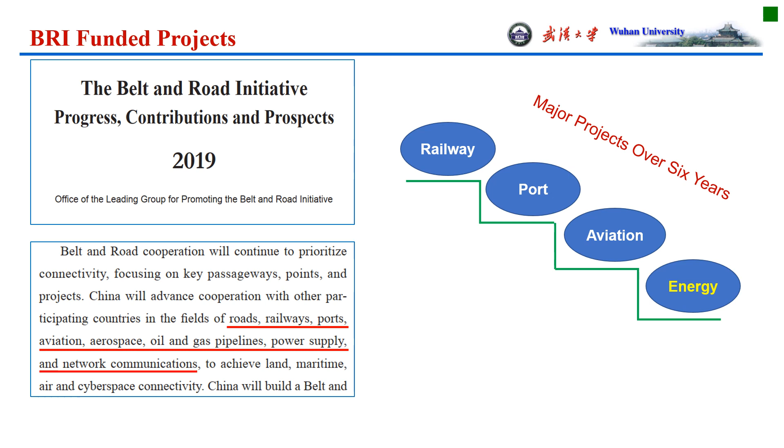Take China-Pakistan cooperation for example. 19 projects under the framework of BRI have been started or completed by late 2018, among which 7 energy projects have gone into operation with a total installed capacity of 3.4 million kilowatts.

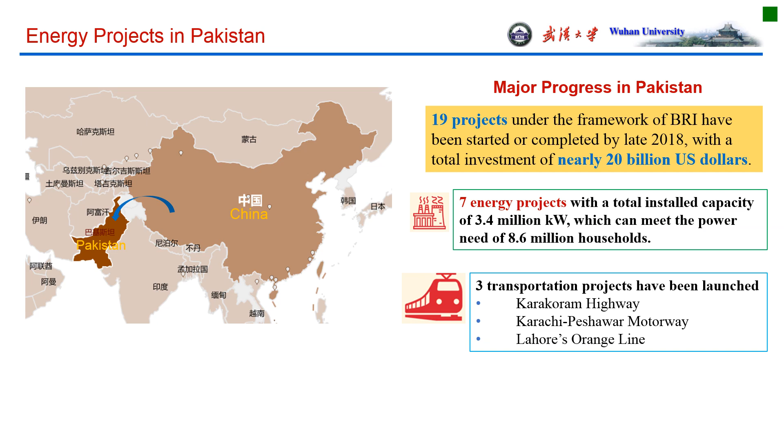which can meet the power need of 8.6 million households. In Nepal, several energy projects funded by BRI have gone into operation too.

Take the Upper Trishuli 3A hydropower project for example. It went into operation last year. The Prime Minister said this project would help to reduce electricity import from India and promote industrialization and modernization of agriculture by increasing the use of electricity.

According to the rules of BRI, more and more hydropower projects in Nepal will be funded. Since hydropower belongs to clean energy, that's why we chose hydropower as a cooperation area between WHU and KU.

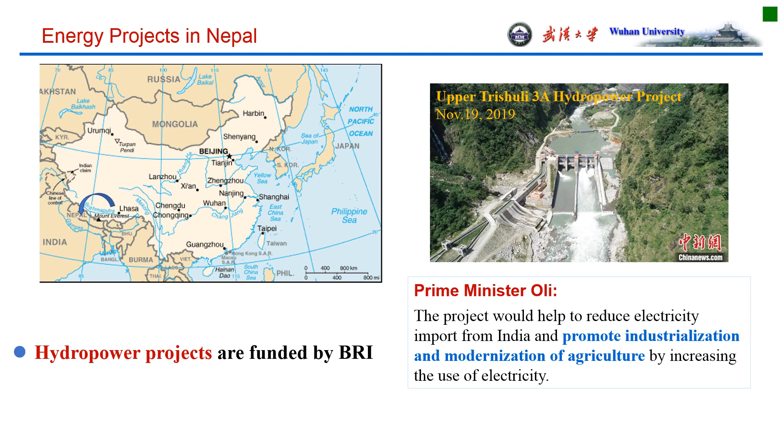It is reported that more than 55% of undeveloped hydropower lies in Asia. All countries in the Himalaya region, including Nepal, have huge hydropower potential.

Under the framework of BRI, developing hydropower in the participating countries will be funded. On the other hand, new technical requirements appear when developing hydropower in the Himalaya region. The sediment problem seems to be a major obstacle for most of the rivers.

There are 20 billion tons of global sediment flux from rivers to the oceans per year, out of which around 6 billion tons are contributed by rivers originating from the Himalaya.

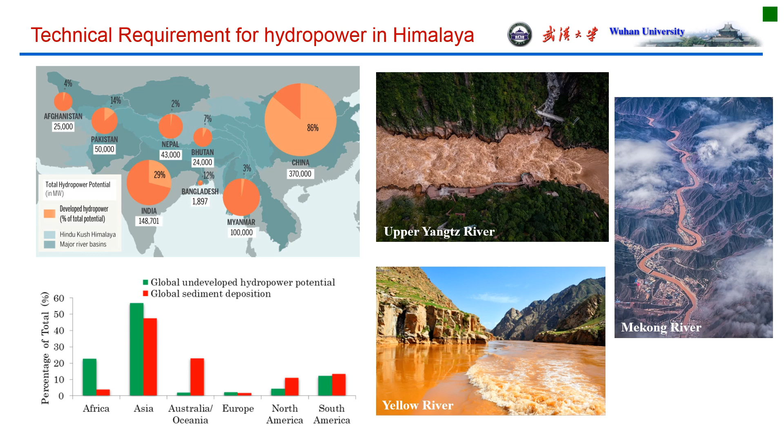The sediment erosion of hydraulic turbines is a major challenge in hydropower development in the Himalaya region, such as China, Nepal, India, Bhutan, Pakistan, and other related countries.

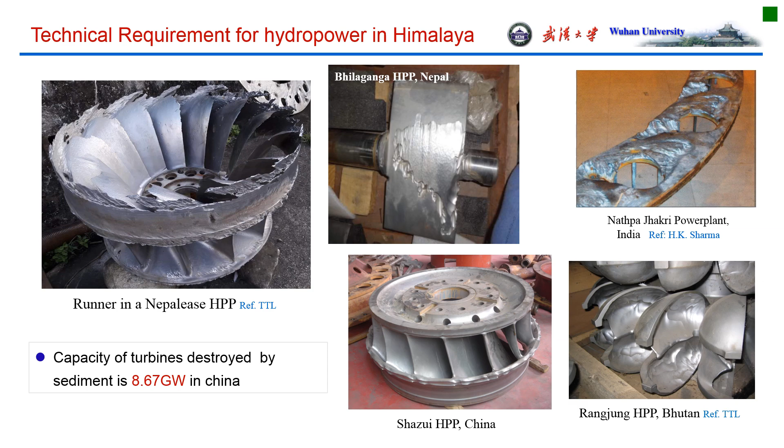We can find from all the figures, in every country, silt erosion is serious. In China, it is reported that the capacity of turbines destroyed by sediment erosion is 8.67 gigawatts. So international cooperation is necessary to meet the technical requirements.

In 2017, an MOU between Wuhan University and Kathmandu University was signed in Kathmandu. Then another MOU between the School of Water Resources and Hydropower Engineering of Wuhan University and the School of Engineering of Kathmandu University was signed too.

The two sides planned to build a joint research center, the Hydropower Research Center for Himalaya Region. It is called for short HRCHR. It focuses on hydropower in the Himalaya region, and the cooperation is under the framework of BRI.

Last March, WHU and KU finalized the draft of the LOA. The president of WHU approved the LOA one month later. Until now, we are waiting for the response from the KU side. I really want to know what is happening at KU. Anyway, we will wait until the deadline.

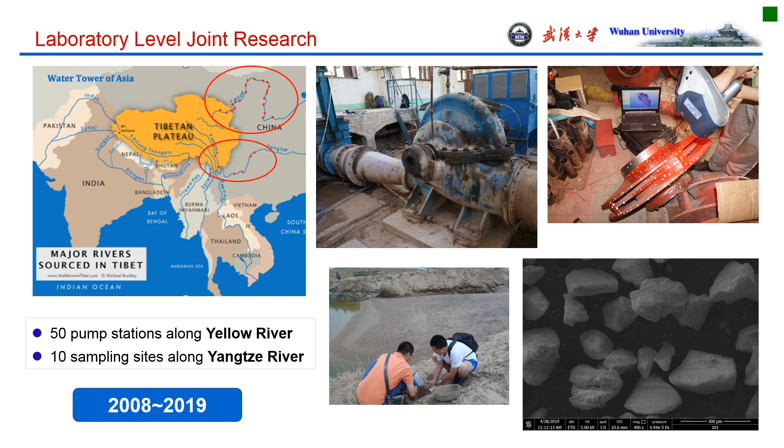In the past 10 years, my research team has investigated more than 50 pump stations along the Yellow River, collecting sediment samples and scanning destroyed pumps using a 3-dimensional scanner. The sediment of the Upper Yangtze River was also collected for analysis. You know, both the Yellow River and the Yangtze River originate from the Himalaya region.

Now, through cooperation, several hydropower plants in Nepal have been investigated. Both sides collected and shared data for further research.

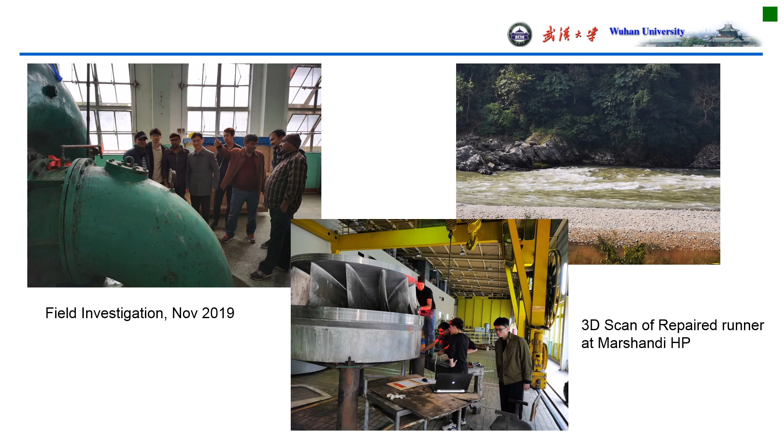From the cooperation, the students from KU learned how to operate a 3-dimensional scanner, which is valuable for reverse engineering, and the students from Wuhan University gained knowledge from the hydropower plants of Nepal.

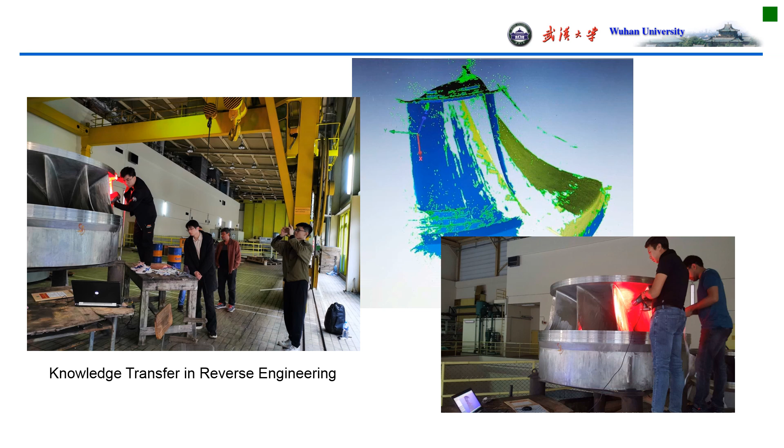Numerical simulation of sediment erosion in hydraulic turbines was also carried out. We chose a turbine from the Jhimruk power plant of Nepal.

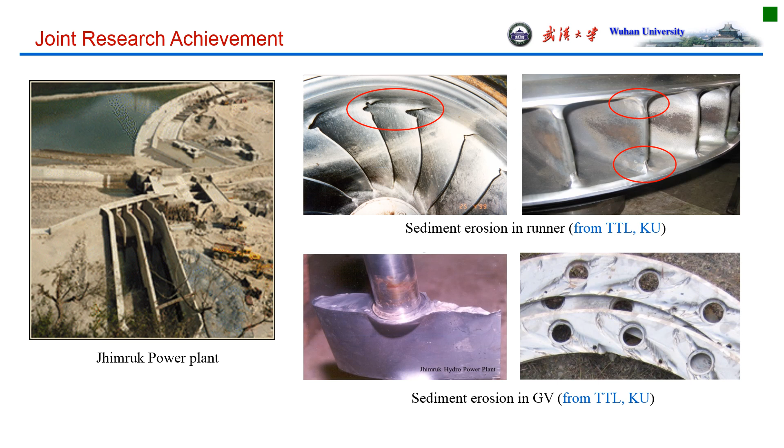You can find from the figures the runner, guide vanes, and facing plates of the turbine were seriously destroyed by sediment after almost 4,000 hours of operation. Even though we know the erosion is inevitable, we want to know why.

An interesting phenomenon was found from numerical simulation. The interblade vortex is thought to be the main contributor to severe sediment erosion at the runner outlet. The silt particles move around the vortex and cut the runner outlet.

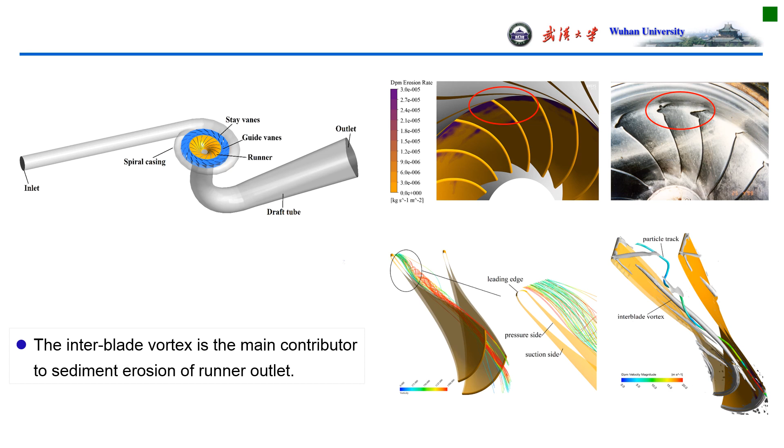By eliminating the interblade vortex, sediment erosion of the runner outlet is obviously decreased, but the flow rate and output power are decreased accordingly. This research is still underway.

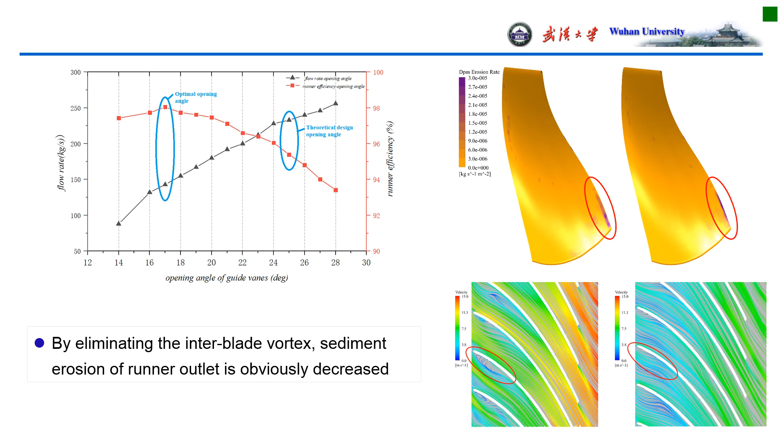I'm sure valuable results will be provided by our cooperation. The two sides have co-authored several publications reporting our new progress in sediment erosion. If you are interested in our research, please read the publications, and you are welcome to discuss with us.